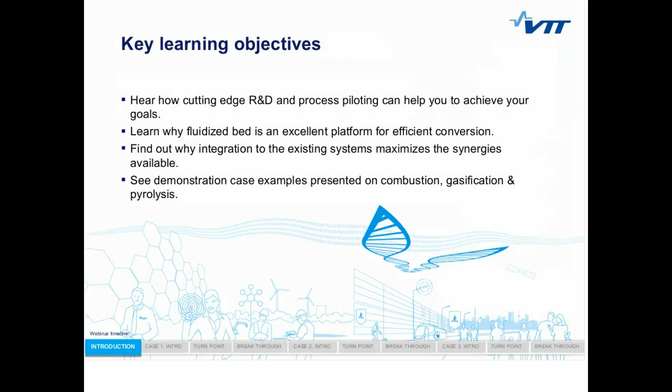Today's presentation is about the fluid bed platform. Just a reminder of some of the learning objectives for today: we hope we can convey to you how cutting-edge R&D and process piloting can help achieve your goals of using residues to generate new revenue streams for your industries. We'll explain why fluidised-bed itself is an excellent platform for efficient conversion, be it combustion, pyrolysis, or gasification. We also want to show you how it makes sense to integrate processes with each other to maximize the synergies available, both energy and material-wise, and also for cutting capital costs. And for each of the topics—gasification, combustion, and pyrolysis—we'll show you demonstration cases of where these technologies have been applied in practice.

Out of the less than 3,000 people at VTT, around 100 professionals work around fluidised-bed technologies. We work on combustion, gasification, pyrolysis, and also catalytic processes. All four areas share a common heart, the fluidised-bed, but the main differences relate to the atmosphere, the temperature, and the technical issues regarding the process itself. Something that really defines us in all of these applications is that we look at clever integrations between processes in order to save energy and capital. We work very closely with industrial partners all the way from the start of the innovation cycle, and we also have excellent experimental capabilities to scale up these technologies towards demonstration and industrial practice.

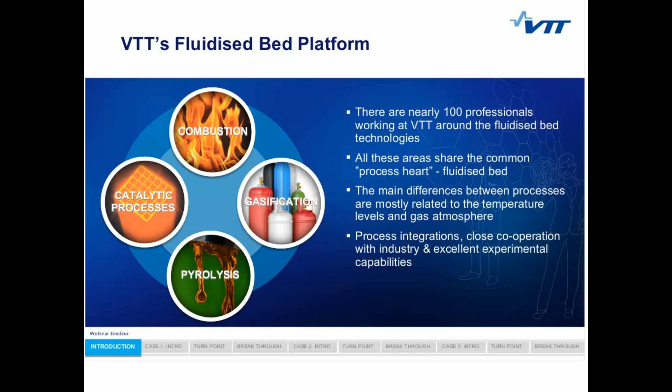Just to give you an idea of the versatility of the fluidised-bed platform itself: we can apply it to combustion for generation of power, heat and cooling; to pyrolysis to produce fuel oil and more advanced oil products—actually, in our case, we have integrated the pyrolysis technology with fluidised-bed, which you will see later in the presentation; and thirdly, gasification, where you can take the synthesis gas into fuels and chemicals, or use it as a fuel gas in boilers, kilns, and engines. So that shows the versatility of the platform itself.

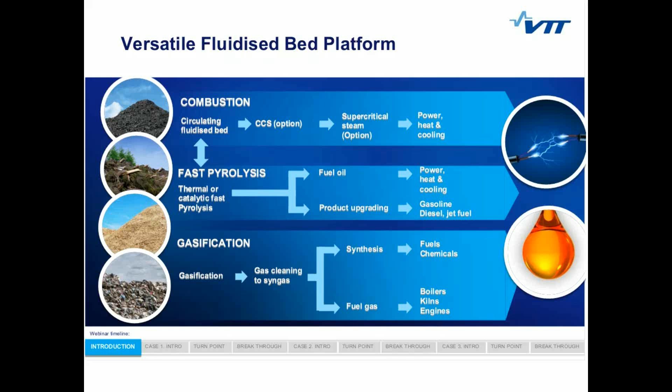What we'll now go through are 3 separate cases. I will start with gasification, which is really about converting, in our case, solid biomass to gas.

Here we can see a schematic of gasification. Basically, gasification is turning carbon-containing material into gas, which contains carbon monoxide, hydrogen, and some carbon dioxide. It takes place at high temperatures, as you can see on the slide, in the presence of air or oxygen, or steam.

Traditionally, you can use this on a very wide feedstock basis, so it has been utilized for coal and for oil. But what we are going to talk about today are the raw materials on the bottom left of the picture, which are biomass, and we'll also talk about waste.

Once we have gasified the feedstock into the three constituents - CO, H2, and CO2 - the gas needs to be cleaned before it can be taken on for further processing. The two main routes are, in the upper right-hand corner, the syngas route into fuels and chemicals, and the other route is to utilize the gas as a fuel gas in kilns, boilers, gas turbines, engines, and so on. The amount of cleaning is dependent on the end requirements of these two routes.

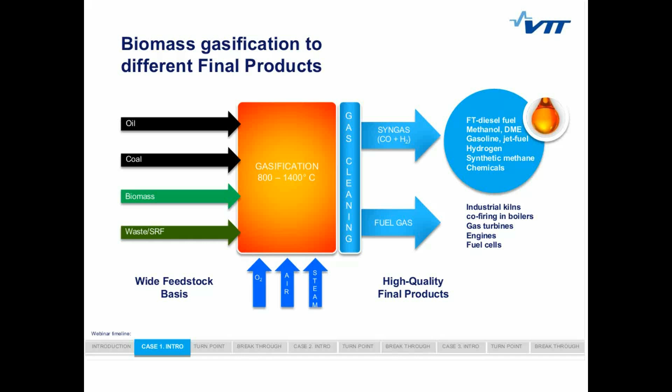If we delve a bit deeper into the process itself, there are two ways of gasification. The traditional method is to have a high temperature entrained flow gasifier and then produce synthesis gas from it. When it comes to biomass, which is our focus today, there is a problem related to handling and feeding of the biomass, so this technology is not very well suited for biomass gasification.

The route that we have taken is to have a fluidised-bed gasifier operating at a slightly lower temperature, which is well suited for having biomass as a feed. The challenge then lies in the conditioning or reforming of the gas to improve its quality before it can be taken for further processing. The presentation I will be showing will concentrate on the fluidised-bed gasification of biomass.

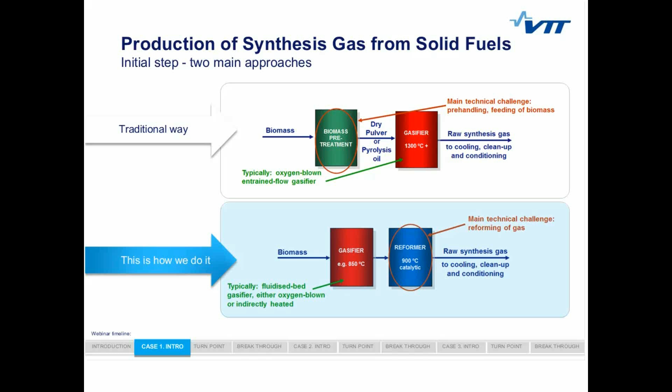The main steps of producing synthesis gas from biomass: we start with biomass drying, so the biomass needs to be dried before gasification. Of course, we need to gasify it and then reform the gas further to improve its quality, and then clean the gas. These first three steps are the ones that have required a lot of research and development in order to produce clean synthesis gas from biomass.

The next steps in the process are to condition the gas and to have gas synthesis, or upgrading into fuels and chemicals. These two last steps are well-proven technology. They have already been utilized for decades with gasification of coal, for example, and they're more or less off-the-shelf processes that can be purchased from vendors.

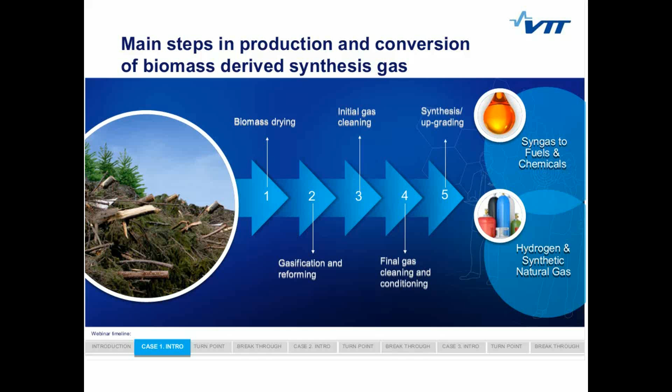We have been involved with gasification research for quite a while, and at the heart of this development is the process development unit we have at VTT, which has a 0.5 megawatt thermal effect. It is a pressurized fluidized-bed gasifier that can be operated either with air or with oxygen, depending on the application we are looking at.

It comes with an advanced filter for high-temperature cleaning of the gas, a catalytic reformer unit for reformation of the gas, a cooler, and then a possibility of taking the syngas for further processing or synthesis. This is a platform that we can use to develop and test various types of gasification processes.

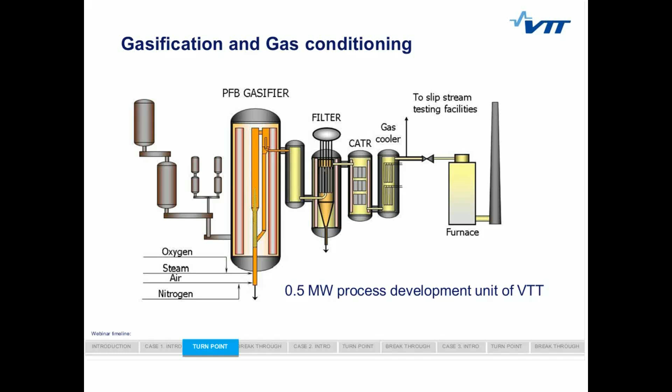The example of gasification that I will be talking about today involves biofuel production from biomass and its integration with the pulp and paper industry. This is a concept that we developed with some of our industrial partners about 10 years ago.

The idea of integrating this biofuel production with the pulp and paper industry comes from two main reasons. First of all, pulp and paper production has a working logistics system for biomass. They already control vast amounts of biomass and have logistics to bring it into their factories, so there is an integration synergy with the biomass logistics.

The second integration benefit comes from the fact that the synthesis of the syngas into Fischer-Tropsch liquids, which can then be converted into diesel, produces high temperature waste heat. This waste heat can be nicely integrated with the pulp and paper mill in order to save fuel at the power plant of the mill, so the mill benefits from this additional heat source.

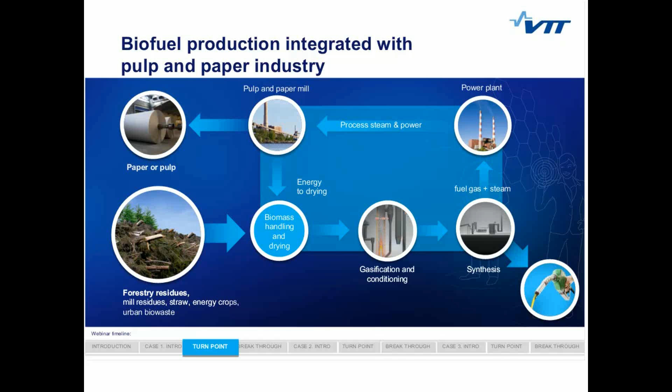Also, some of the low temperature heat that is usually available at the pulp and paper mill can be utilized back at the gasification process for biomass drying. So it gives a possibility of utilizing waste heat that otherwise needs to be discarded into the environment. This concept has been piloted, and I will show in the next slides some examples from industrial demonstration of this concept.

This took place a couple of years ago at Varkaus mill in Finland, in the eastern part of the country. There was a joint consortium by a Finnish oil company, Neste Oil, and a Finnish pulp and paper company, Stora Enso. They built a demonstration unit at Stora Enso's Varkaus mill with the idea of converting forest biomass into liquid transportation fuels.

VTT's role was to carry out research and development activities in gasification, gas filtration, and the reforming of tars and hydrocarbon gases on the way to becoming synthesis gas. With our long experience, we also brought expertise regarding gasification and gas cleaning.

From a technical point of view, the demonstration went really well. There were long periods of time where the gasification was operated continuously at a very high availability.

This demonstration did not yet result in an industrial plant being built, but with the experience from this demonstration, we now have all the possibilities of actually designing the first commercial size plant. As an example of how good the gasification technology is, the gasifier itself is still operating at the mill, producing fuel gas for the lime kiln of the pulp mill.

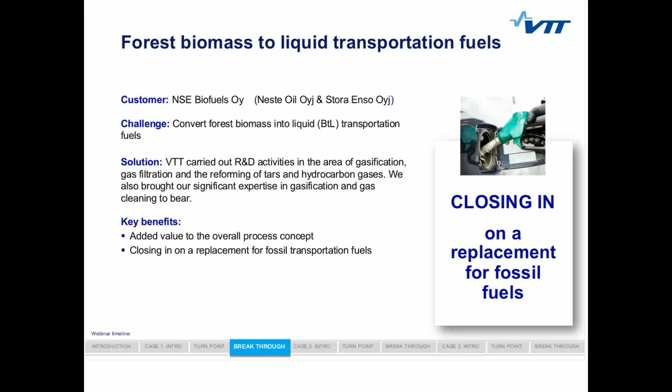One of the questions that pops into mind when looking at these new business opportunities is economics. How profitable is it to produce liquid biofuels from forest biomass? What we recently did is carry out techno-economic calculations of 20 plant concepts, looking at large-scale gasification of biomass into 4 different liquid transportation fuels: methanol, dimethyl ether, Fischer-Tropsch liquids, and gasoline.

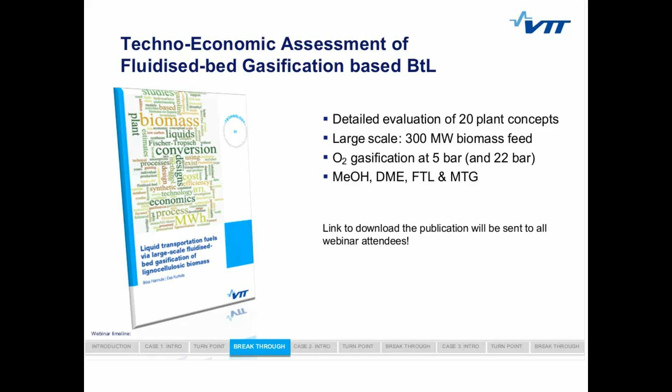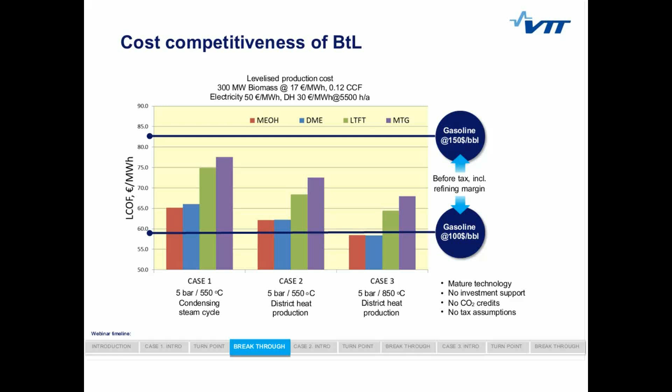What we can also see from this slide is that if you compare the bars on the left with the bars in the center, you can see the difference between having heat integration of the process. On the left, there's an assumption that the waste heat is not sold as heat but goes into power production, whereas in the center, part of the heat can also be sold as heat to the surrounding community. And again, the difference in economics between case 2 and case 3 shows the difference in how advanced or how efficient the production technology is.

Another opportunity related to gasification is to gasify waste and co-fire it in existing boilers. That can actually provide a quite cost-efficient way of reducing CO2 emissions in existing boilers.

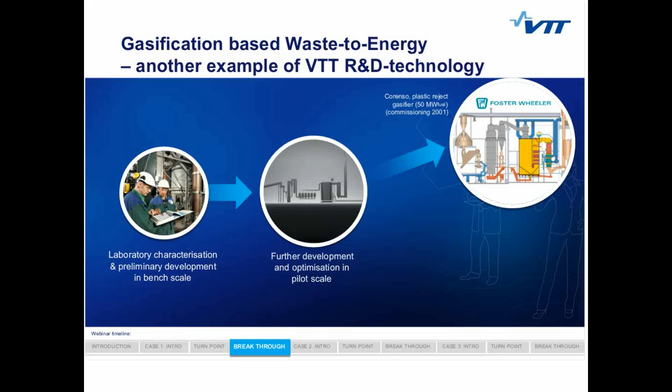We have been actively involved in that path too, starting from lab characterization and bench scale development for these types of concepts, moving into pilot scale of these waste-to-energy concepts, and eventually ending up with 2 commercial examples. The first one was installed at Corenso in the early 2000s, where the feed is plastic reject that is gasified. The second one, from 2 years back, is at Lahti Energia in Finland, where solid waste is being gasified. These are existing plants operating at this moment.

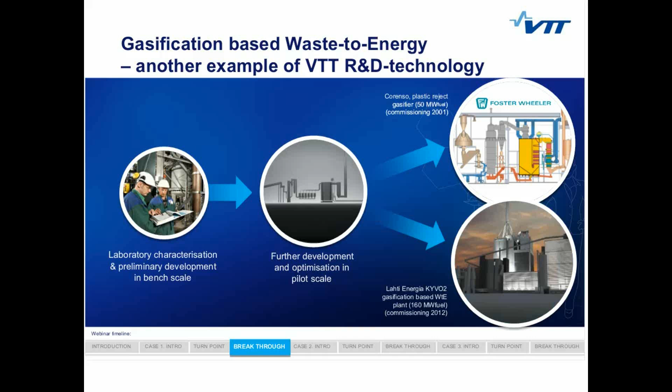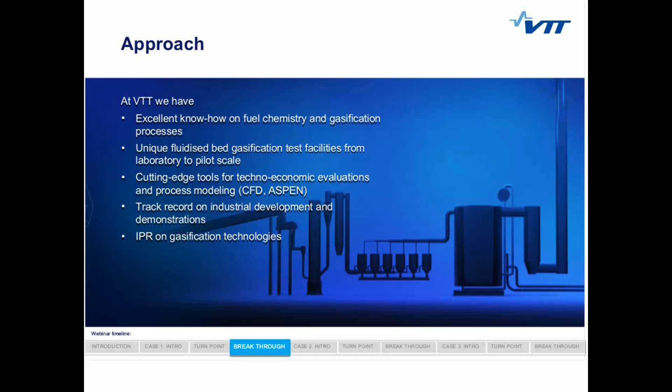To sum up our approach to gasification: what we can offer is excellent know-how on fuel chemistry and the gasification processes themselves, unique test facilities all the way from laboratory to pilot scale. We also have very good mathematical modeling tools for process modeling, both steady state and CFD, which is computational fluid dynamics. We have a proven track record, as you've seen, on industrial development and industrial demonstrations, and we also own some IPR on gasification technologies themselves.

So really, with gasification, you get the possibility of upgrading a wide range of cheap and low-quality feedstock into valuable products and intermediates. The two examples I've shown are the industrial-scale production of superior quality liquid biofuels, and the cost-effective way to recover energy and materials from waste, while at the same time reducing CO2 emissions in existing power plants.

As with any technology, there are further development needs. At large scale, we still need to work on efficiency to bring the cost of production down. But there are also exciting possibilities related to smaller scale gasification processes, and the possibilities it gives for integration into smaller units, and the possibility of having distributed production of intermediates with a centralized upgrading facility.

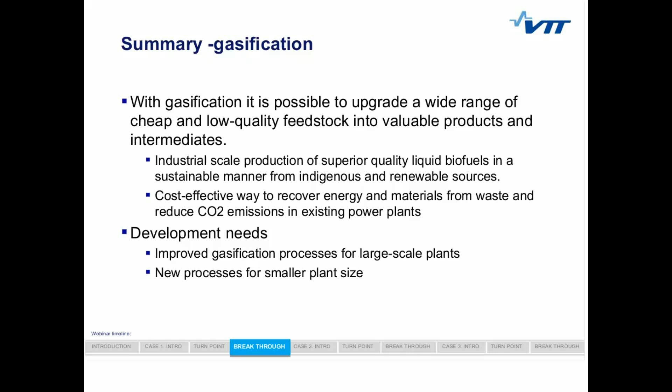I will now move on to the second case, which is combustion, and I will be concentrating on circulating fluidized-bed combustion for high efficiency and low emission energy production.

The fluidized-bed combustion technology has many advantages, and it started with the idea of having combustion technology that can handle difficult fuels. So fuel flexibility is one of the defining features of fluidized-bed combustion technology. It can tolerate high moisture, high ash, and high sulfur fuels, and mixtures of different fuels. It also provides low emissions, both sulfur emissions with the possibility of injecting limestone into the bed itself, and low NOx emissions because of the low and uniform combustion temperature in the combustion chamber.

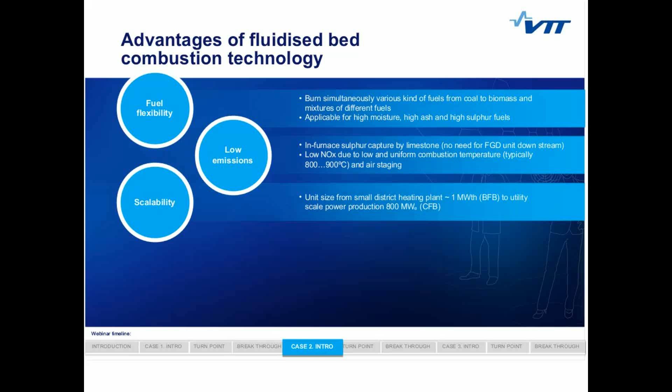As I'll show you, it also provides excellent scalability all the way from very small district heating size units of 1 megawatt up to utility scale power production. It also now can compete efficiency-wise with large pulverized coal plants due to advances in technology which has allowed us to move into supercritical steam parameters, achieving over 40% electricity efficiency in power plants. And it is quite well suited for oxygen combustion, which is a route to carbon capture and storage, as I will show you a bit later in this presentation.

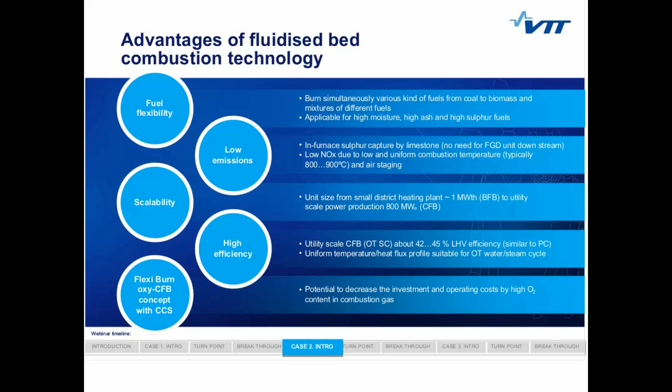So on this next slide, you can see the quite remarkable transformation that has taken place in the last 2 decades when you look at the size of the plants that have been able to be built with fluidized-bed technology. Really one of the most important milestones is located in 2009, which is the first supercritical once-through circulating fluidized-bed boiler built in Poland at Lagisza, which is now operating and has actually operated very well. And with the improved efficiency has really given a remarkable reduction in CO2 emissions due to the high efficiency.

And now plants are being built that are even larger than that, and plans exist for even larger plants, which I show here in green, as we are trying to approach the 800 megawatt milestone in size.

Another thing you can see, the small bar in the middle is the start of the next generation, and that is the size of the current demonstration unit which exists for the oxy-combustion plant, which is very well suited for carbon capture and storage.

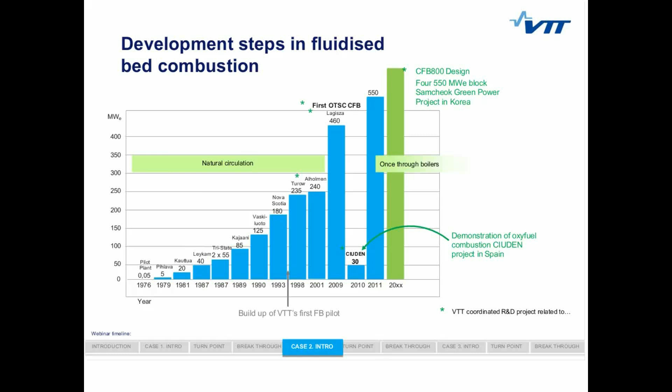Of course, one of the goals is to reduce the CO2 emissions related to power production. This slide illustrates the effect of increased efficiency on the reduction of CO2 emissions. If we look at the average European efficiency for power production, which lies at around 35%, as indicated on the slide, and compare it with the best available CFB technology today, which is close to hitting the 45% mark, that will translate into a 21% reduction in specific CO2 emissions per amount of produced power.

If one needs to go further down on that, fluidized-bed combustion offers the possibility of co-firing with biomass. Here we can see that if we were to substitute 20% of the coal with biomass, that would bring down the reduction almost to 40% from the original emissions. And as I will show you later on, further reductions are of course possible when we start capturing the CO2 from the combustion itself.

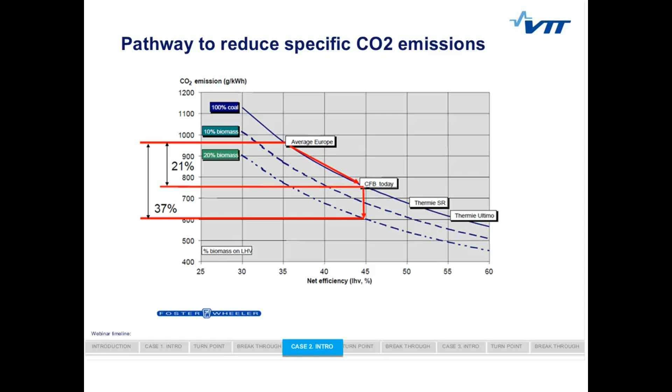All this scale up has not been easy, and it has involved a lot of research and development in order to understand what actually takes place in the combustion and in the boiler itself. We have done a lot of work in bench scale in order to understand the phenomena behind the operation and design of the boiler.

So, how will it behave once we move into once-through boilers, how will it behave if we move into oxygen combustion. From those phenomena-based models and bench scale, then moving on into pilot scale and incorporating all that knowledge into 1D submodels of the boiler. And eventually, during the scale-up, transferring all that knowledge and experimental information into the actual design software for the boilers in 3D format, and then actually being taken operational in utility scale.

And this is in essence what we do when we do R&D and scale up in combustion.

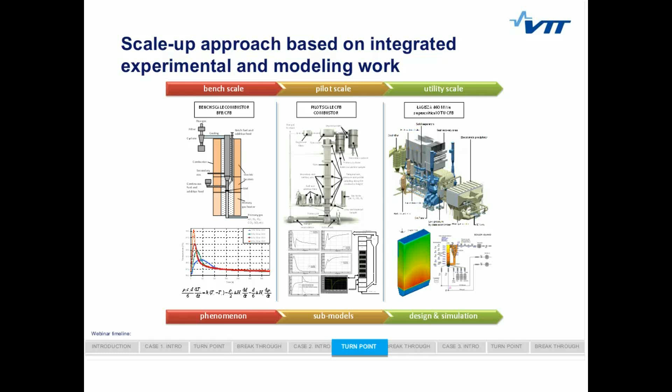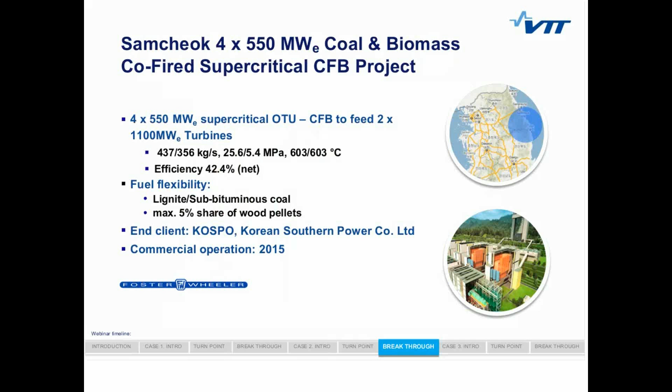The next generation of fluidized-bed is what I'm going to present now. It's called the FlexiBurn concept, which is about trying to design a boiler that could be operated both in a normal mode using air as a combustion medium, but also using pure oxygen as a combustion medium in case we want to capture the CO2 from the boiler. The reason for using pure oxygen, if we want to capture the CO2, is that we will have an atmosphere of CO2 and water, and just by condensing the water from the flue gas, we will end up with pure CO2.

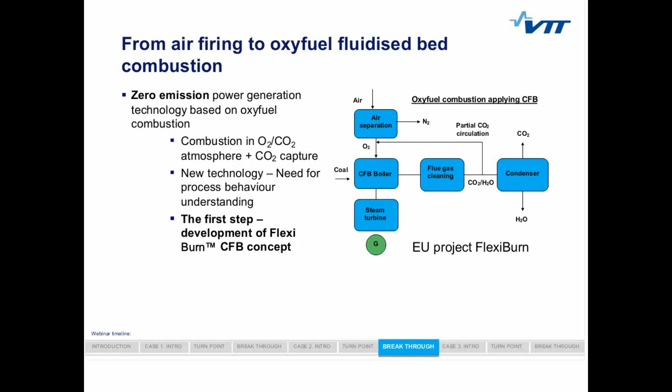This technology has now been scaled up in several steps. The first two steps took place at VTT. The 1 megawatt piloting scale step took place at CANMET in Canada, and there now exists a demonstration plant in Spain of 30 megawatts.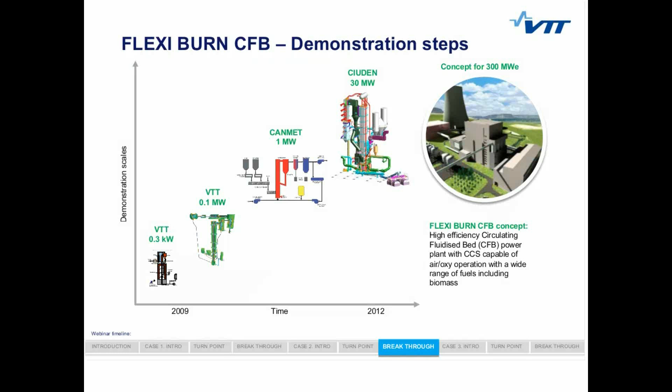So again, looking at combustion, what can we do to help with your fluidised-bed combustion? We can be involved early on during the investment planning and design of the plant and the boiler. We can run techno-economical analysis on the economics. We can do fuel characterization services to see how the fuels will behave in the boiler. We can do extensive process and CFD modeling, also dynamic process modeling to look at the ramp ups and ramp downs. Especially when looking at once-through units, it will really pay off to combine the fuel characterization services with some dynamic modeling services to see how the boiler will actually behave.

And of course, we have long experience in biomass co-firing concepts and on oxyfuel. So, summarizing the benefits of CFB technology: it has fuel flexibility, low emissions, and now it's actually matured to utility scale with high efficiency, and it is well adaptable to oxyfuel in case one wants to employ carbon capture and storage in the boiler. We have been a key research partner in these steps towards these high efficiency, large scale boilers.

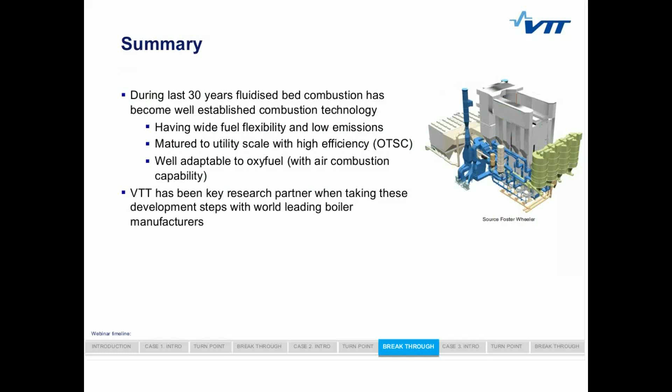But again, there still lie some technical challenges, some development needs, which are listed here: the ever-increasing need to increase efficiency and to come down in emissions, and also widening the fuel flexibility, now taking into account some agricultural residues as well. One of the issues that is really topical these days is how can we improve the dynamic performance, the load following capability of these units, as the electricity system is moving into having more and more intermittent wind and solar energy production.

And of course, one of the targets that we are already going towards is looking at zero CO2 with carbon capture and storage.

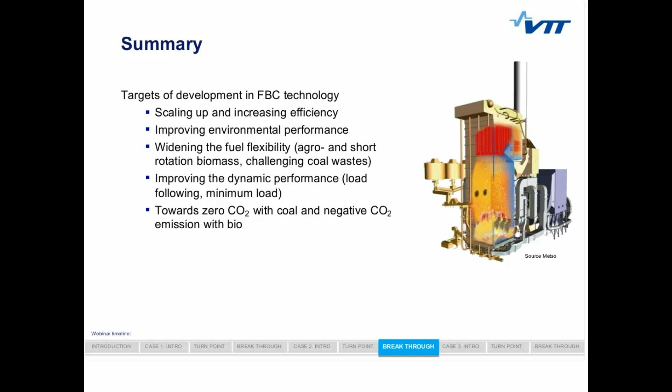Last but not least, let's move on to fast pyrolysis and see what the integrated bio production is all about. Here on the schematics, what we can see is pyrolysis, which really is about converting biomass at around 500 degrees temperature with a short residence time of 1 or 2 seconds into 3 main components: volatile organic components, non-condensable gases, and char. That takes place in the reactor on the left.

So the non-condensable gases, the volatile pyrolyzed products, and the char are then taken into cyclones where the char and sand are separated. In the liquid recovery, we recover the oil, which typically amounts to about 60 to 75% of the biomass, and then the gases are sent back to the combustor that provides the necessary heat for this pyrolysis reaction. How the pyrolysis reaction actually gets its heat is through a heat transfer sand that circulates between the combustor reactor and the cyclones.

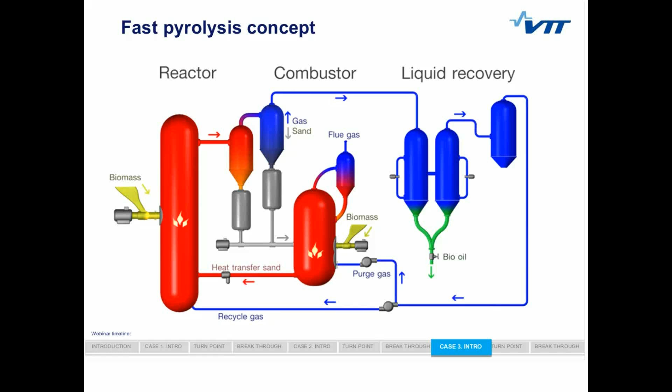So fast pyrolysis of biomass actually has several advantages. First of all, from an investment point of view, the pyrolysis plant is quite a moderate investment. The production costs for heating bio-oil, for example, are also quite competitive. From a logistics point of view, this concept allows the possibility to produce the bio-oil in a distributed manner close to the biomass itself, and then transport the intermediate product, the bio-oil, into a more centralized upgrading facility. And this upgrading facility can of course be a mineral oil refinery where this product could be blended into the mineral oil stream.

It also gives the potential for phased implementation into biorefining business, so one can start with the bio-oil and then add more and more conversion steps, moving into higher value products, which can be fuel for power production, transportation fuels, or even chemicals.

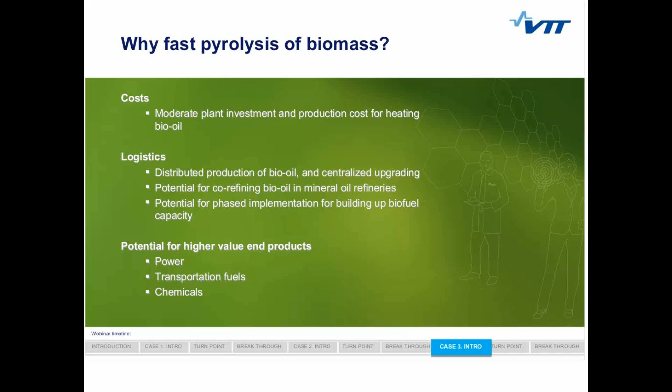We have been working with two fast pyrolysis concepts. The first concept is pyrolyzing biomass and producing bio-oil. This is the concept I will be concentrating on for the rest of the presentation, showing the upscaling from pilot all the way to the industrial demonstration plant that we currently have in Finland.

The other alternative for this path is to continue upgrading the bio-oil with hydrotreatment to remove oxygen from it and upgrade the quality, and then end up with transportation fuels.

The other path we are working on, at a smaller scale at the moment, involves catalytic pyrolysis, meaning the bio-oil that comes out is already of higher quality than with the first concept. This gives the possibility of utilizing the bio-oil in stationary engines to produce electricity, or with some more upgrading, to produce transportation fuels or chemicals. Here the hydrotreatment does not need to be as severe as with concept one.

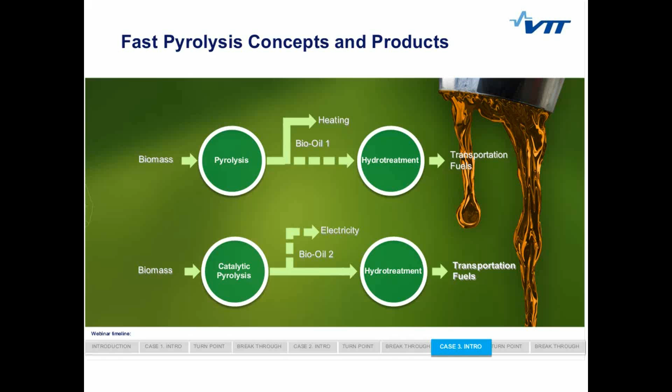As with gasification and pyrolysis, we have very unique facilities available at VTT. With fast pyrolysis, we have a continuous process development unit, which is unique, capable of producing 300 kilos of biofuel oil or 100 kilos of catalytic bio-oil a day. Again, as with gasification, this is the development and test unit we use to develop our new concepts.

What is unique to us is the way we actually combine pyrolysis with combined heat and power production. We combine the pyrolysis reactor with a fluidized-bed boiler, and that is the VTT concept.

There are basically two reasons for doing that. First of all, the fluidized-bed boiler itself will provide the heat necessary for the sand for the pyrolysis process, so we do not need to invest in a separate combustion chamber that would provide the heat otherwise. This results in some capital cost savings with this concept.

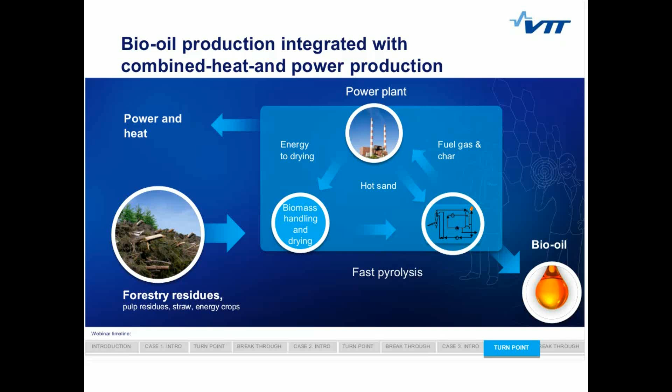Valmet started developing their own process based on our concept, and they took it into their piloting unit, the 2 megawatt piloting unit. On this slide, the green bars show the quite rapid advancements in the operational availability of the piloting unit during the piloting phase, starting from virtually zero, going all the way up to over 90%.

What we can see here, on a smaller scale, is how well our process development unit results coincide with the results achieved from the piloting unit, which shows that the scale-up has been successful, and that we can also utilize the experience from our PDU in scaling up.

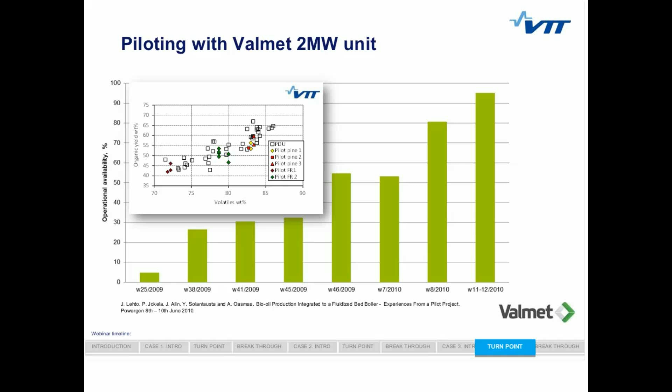This has all now evolved into an industrial demonstration that takes place in Joensuu, Finland, where Fortum Power and Heat has installed a demonstration-scale pyrolysis plant at their power plant, and are actually using the bio-oil as fuel there. They want to demonstrate the viability of the bio-oil as a replacement for fossil fuels in heat production. This utilizes our patented process concept.

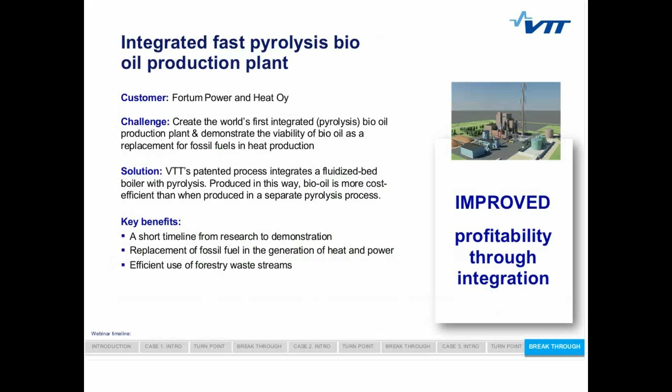Our approach, what we can offer when it comes to pyrolysis, is a unique process development unit, world-class bio-oil chemistry know-how, our computational capabilities in process modeling and computational fluid dynamics, and again, track record in industrial development and demonstration.

With pyrolysis, this provides the possibility of generating value-added products from forest residues. It has a quite moderate plant investment, giving the potential for phased implementation into the biorefinery business itself. We have also shown that integrated concepts have cost benefits against standalone concepts, so production cost will be lower with the integrated concept.

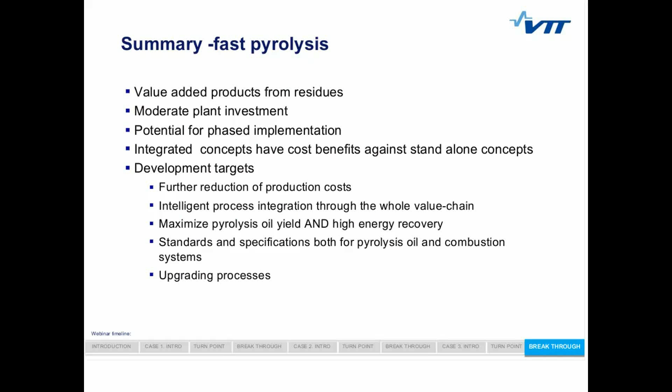As with any technology, we are still working hard on bringing up the efficiency and bringing down the cost through better processes and better integrations within the entire value chain, from the feed material to products.

In the future, what we're actually doing right now is moving and upgrading our piloting facilities into a new location in the Helsinki region of Finland. We hope to have our gasification and pyrolysis pilots operational there by the end of this year, and potentially in the future also bring more chemical process chemistry and biomass fractionation pilots to the same site, so we can improve our services all the way from raw material into products.

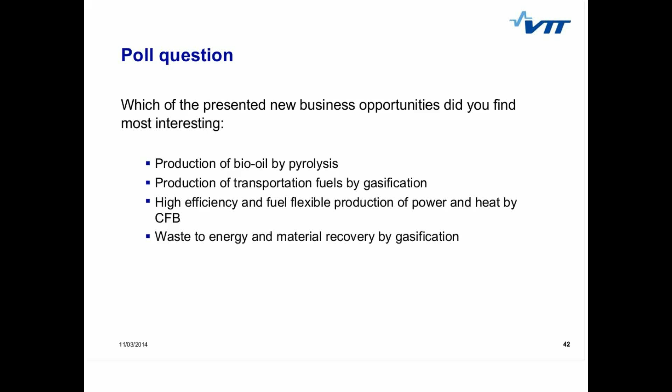So if I carry on now, I have just a couple more slides before our Q&A session, and I really would like to provide you with the opportunity to actually meet us face to face and live. There are a couple of opportunities in the near future for doing that.

The first opportunities are actually two trade fairs that take place coincidentally at the same time in June. One is Powergen Europe, where all our energy people will be there. So if you're interested in combustion, and also our experts in pyrolysis and gasification will be there too, you'll be able to meet us at Powergen Europe in Cologne, Germany, in Hall 6.

And if you're more into the pulp and paper industry, looking at more business opportunities there - how to integrate pyrolysis or gasification as part of your pulp and paper industry - you can also meet us at the Pulp Paper Trade Fair in Helsinki, Finland, on the 3rd to 5th of June.